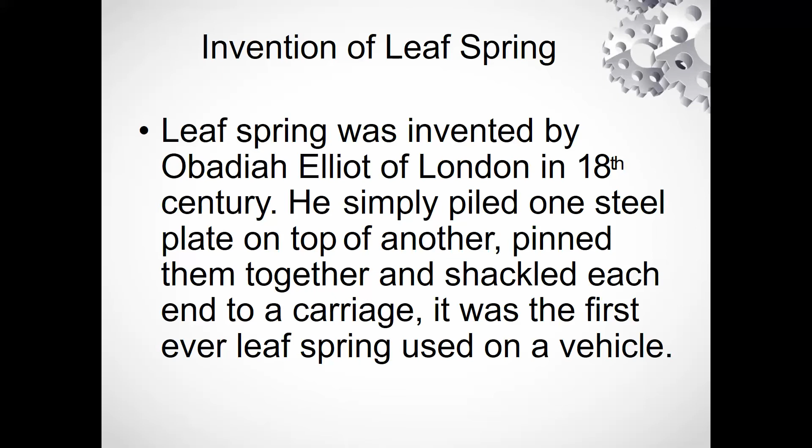Next, we will discuss the manufacturing, construction, and characteristics of leaf spring. Initially, we will start with: what is leaf spring? It is originally called a laminated or carriage spring, as we discussed in the introduction part, and sometimes referred to as a semi-elliptical cart spring.

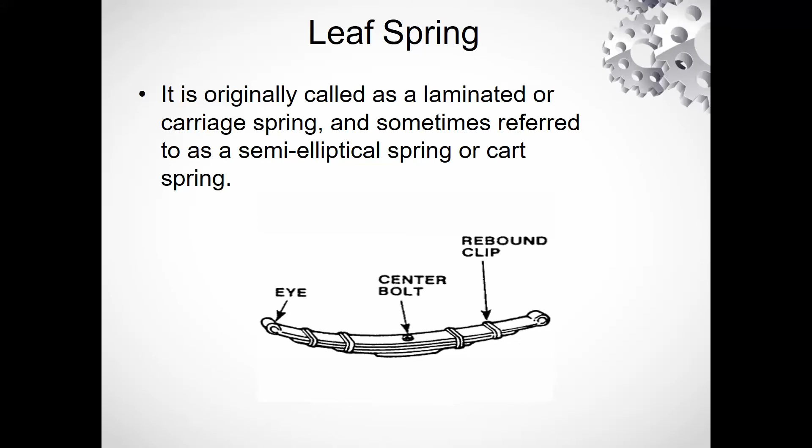The main components of the leaf spring are the eye, center bolt, and rebound clips. Rebound clips help to tie up the several size leaf springs, and the center bolt holds and ties them up to the middle one, and the eye helps us to lock it with the carriage.

Let's discuss the principle of leaf spring. The principle of leaf spring is that it is a simple type of suspension spring which is commonly used in heavy vehicles.

The overall purpose of a leaf spring is to provide support for a vehicle. It also provides a smoother ride, absorbing any humps and potholes in the road. Leaf springs are also used to locate the axle and control the height at which the vehicle rides, and help to keep the tire aligned on the road.

Because of these benefits, leaf springs are in high demand. Casual transportation is just one of the ways leaf springs have contributed to our transportation industries. These days, leaf springs are more popular with heavy commercial vehicles like trucks, SUVs, and vans.

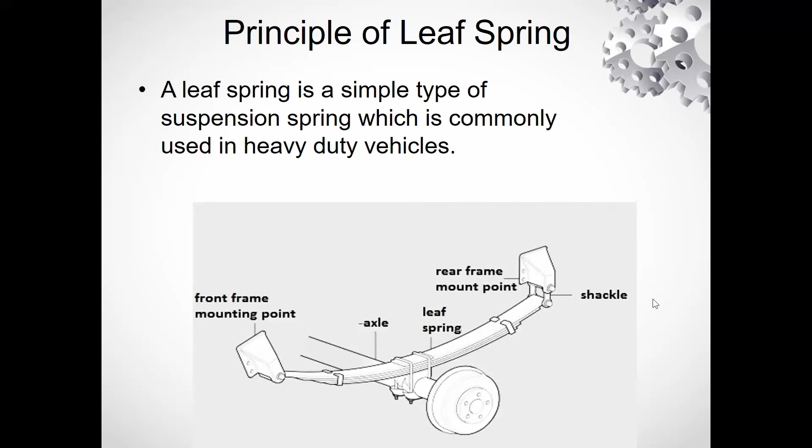Leaf springs have different roles in different sectors, as we will discuss, initially with farming. It is said that the idea of using leaf springs to support farm equipment inspired their invention. Leaf springs were used in medieval times, back when agriculture was a major industry leader. Improvements like the leaf spring made it easier and faster for farmers to haul and transport goods for trade.

Although the design of the leaf spring has improved over the years, the same concept is used in today's farms. In industrial equipment, leaf springs have also been used.

Without the use of leaf springs, construction vehicles would not be able to tow heavy loads. It is important for construction vehicles to be able to carry heavy items like bricks, stones, concrete, and massive materials. It really doesn't matter how large a vehicle is; if it is not designed to support overbearing loads, it will not carry out its duty, resulting in breakdown and unnecessary cost.

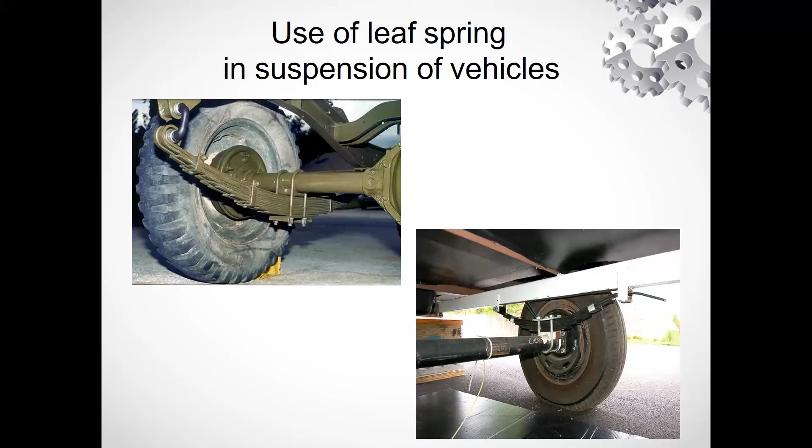In addition to transporting construction items, leaf springs are also beneficial to areas that tend to receive high amounts of snow. Plowing high volumes of snow can get heavy once it freezes. Having your truck equipped with heavy duty leaf springs will abolish unnecessary stress and help it last through the winters.

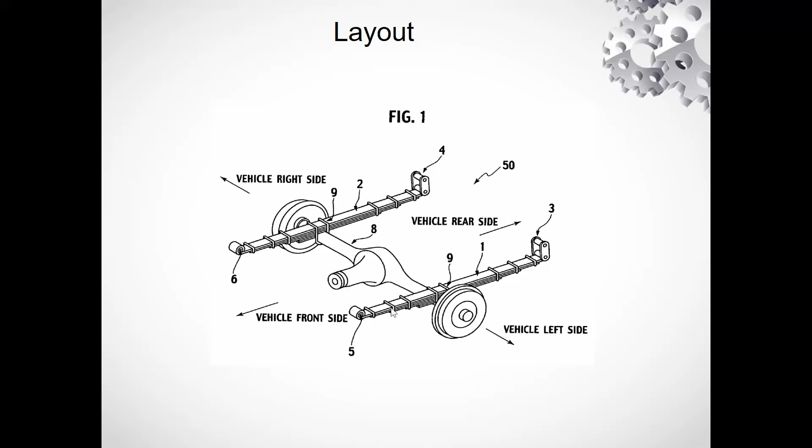Let's discuss the types of leaf springs. Initially we have elliptical or semi-elliptical leaf springs. Let's start with the elliptical leaf springs. Elliptical: two leaf springs can be combined facing away from each other to create an oval shape. This is known as elliptical. Then we have semi-elliptical. This is the normal shape of the multi-leaf springs, similar to the bow of a bow and arrow without the string.

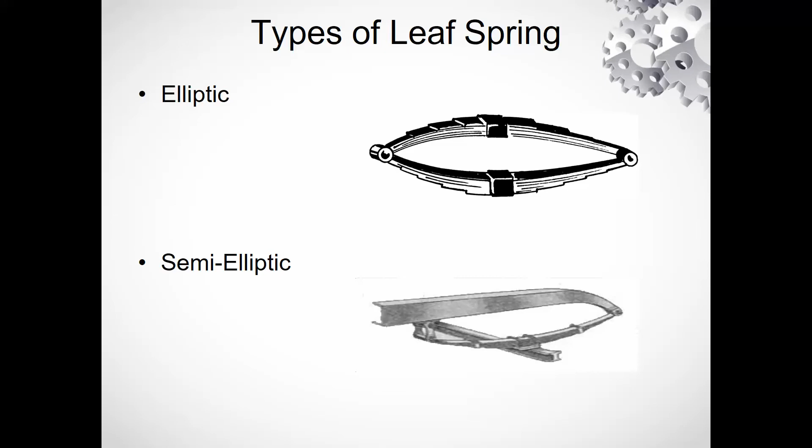Then we have 3/4 elliptic. In the 3/4 elliptic, some large vehicles can be seen sporting an extra half of a leaf spring to support the normal leaf spring positioned over the top of the axle. In quarter elliptic, this is an older type of leaf spring with a similar structure to that of a normal leaf spring. The only difference is that it is half.

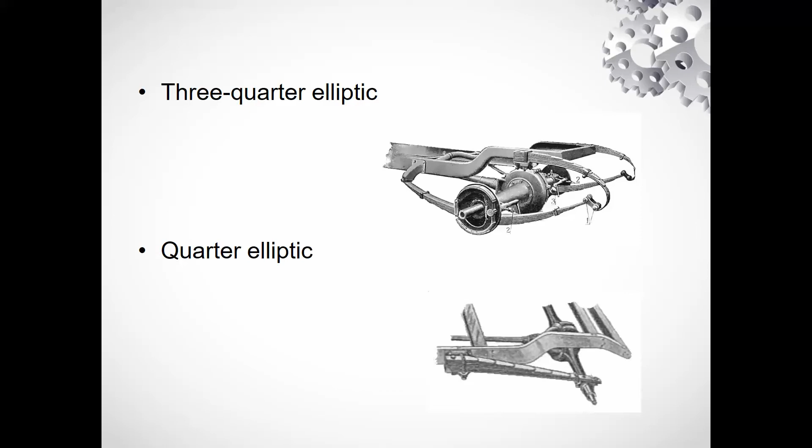Then, last, we have transverse. Transverse leaf springs were positioned across the car from wheel to wheel rather than over the wheel. Again, these are an older type of spring that isn't often used anymore.

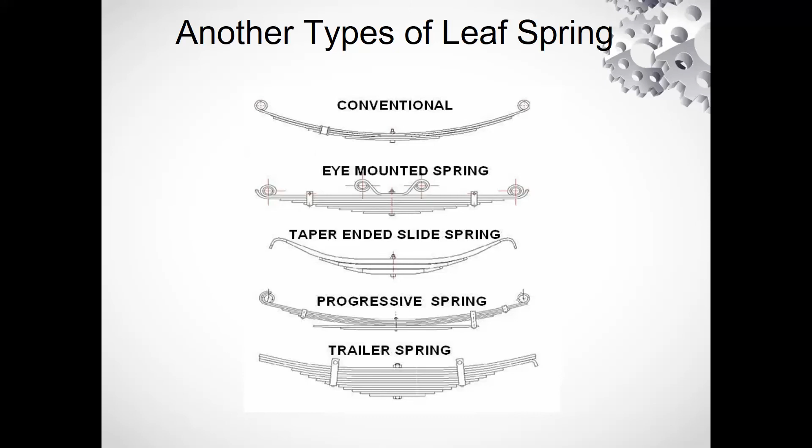Now we have some other types of leaf spring: conventional leaf springs, eye mounted leaf springs, taper ended slide springs, progressive springs, and trailer leaf springs. These are types of leaf springs which are used for special purposes, or they are designed only for some special vehicles.

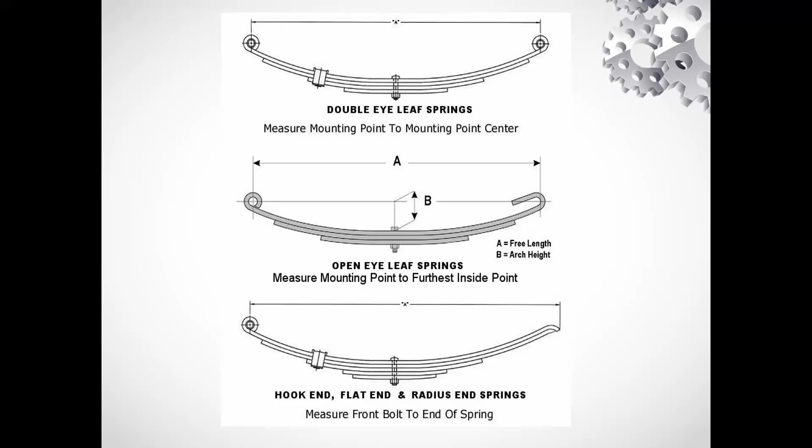Third type, we have hook end, flat end and radius end leaf springs, in which one side is eye-pieced, second we have radius end springs, and some leaf springs are flat end. These are combinations of different leaf springs arranged depending upon the use or specialized purpose. In the full tapered springs, you can see we have an eye at both ends.

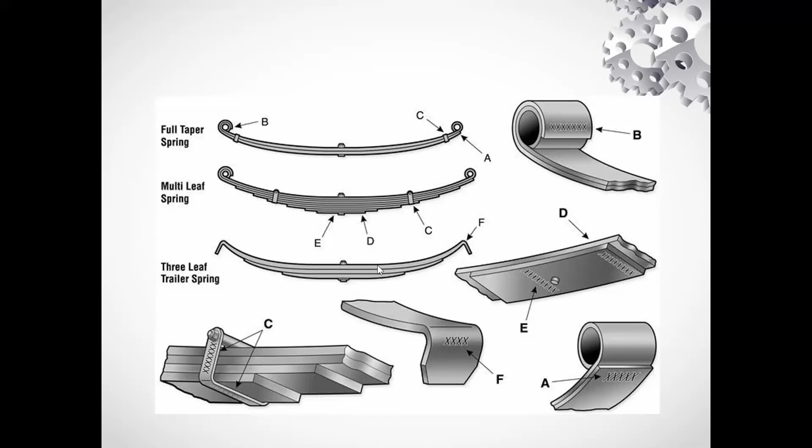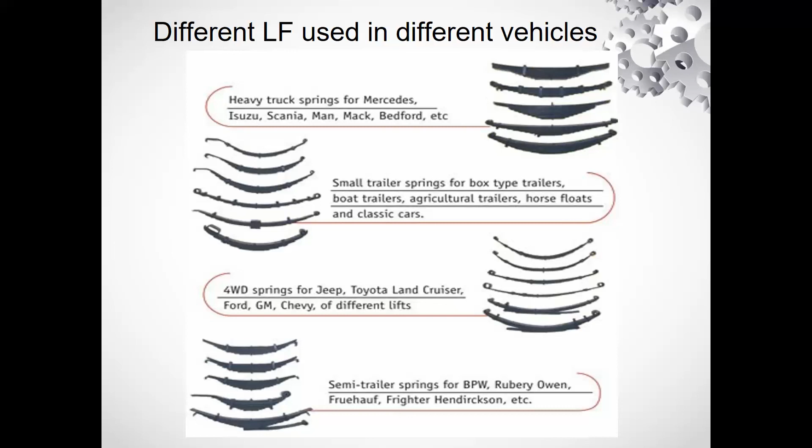Taking the next one, we have semi-trailer springs for BPW, Rubery Owen, Fruehauf, Frighter Hendrickson, etc.

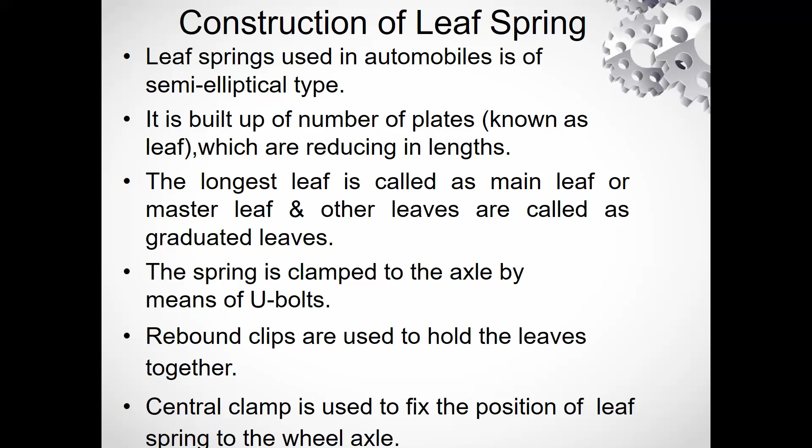This is the construction of a leaf spring, how the leaf spring will be formed, or how the combination of different leaf springs can be formed. Let's discuss the characteristics of leaf springs. The leaf spring acts as a linkage for holding the axle in position, and thus separate linkages are not necessary. We are eliminating the separate or additional linkage from the whole assembly. It makes the construction of the suspension simpler and stronger.

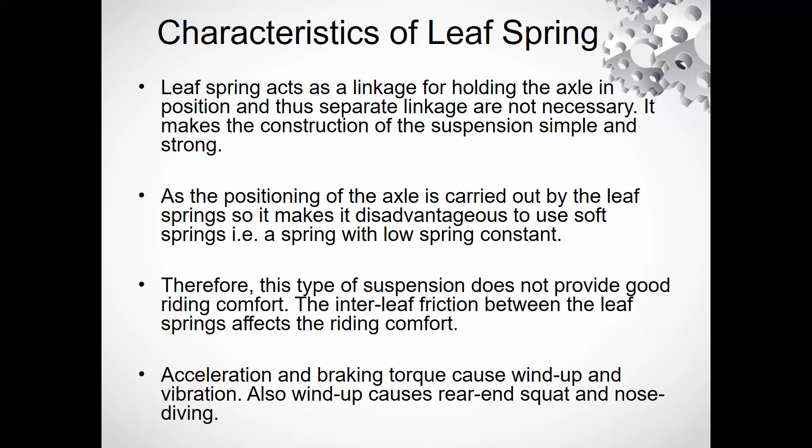The interleaf friction between the leaf springs affects the riding comfort. If we put some sleeves or friction reducing material between the leaves, it increases the riding comfort. Acceleration and braking torque cause wind up and vibration, and wind up causes rear end squat and nose diving.

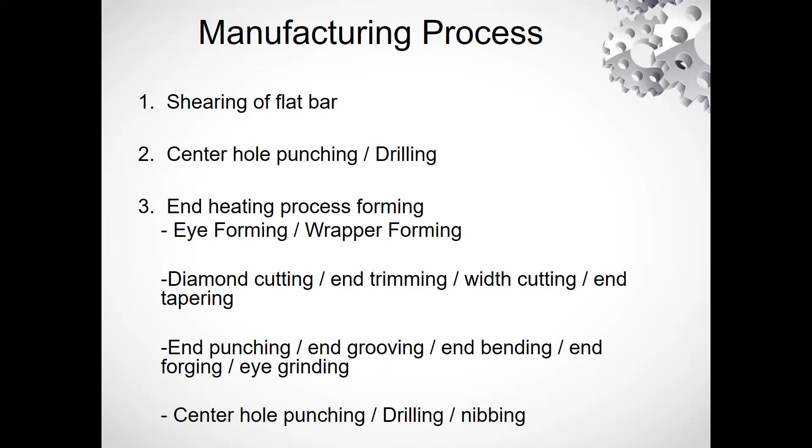We have to wrap one end of the leaf spring, which is known as the eye of the leaf spring. Diamond cutting and trimming, width cutting and tapering are the processes done on the master leaf spring. End punching, end grooving, end bending, forging and eye grinding. These are all the processes done on the end of the leaf springs. Then center hole punching, drilling and nibbing.

Next we have the heat treatment processes. For the heat treatment, initially we are heating all the leaves. Then we use camber forming, then the hardening process, then quenching, then tempering, by which we are able to harden the material as well as make it brittle. Third, we are tempering the leaf springs, by which we get a tempered, highly durable and efficient material.

Last, we use surface preparation. For this, shot peening or shot stress peening, and last is prime painting. Shot peening is the process by which we are able to reduce the internal stresses induced during cold working on leaf springs. In shot peening, we have 1 mm abrasive particles, kind of balls, which are shot on the leaf springs, which reduces the internal stress induced during cold working. Last, for better life cycle, we prime paint all the leaves.

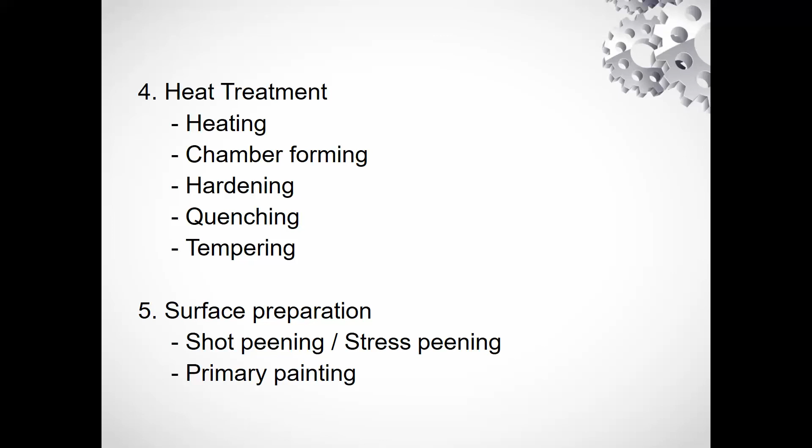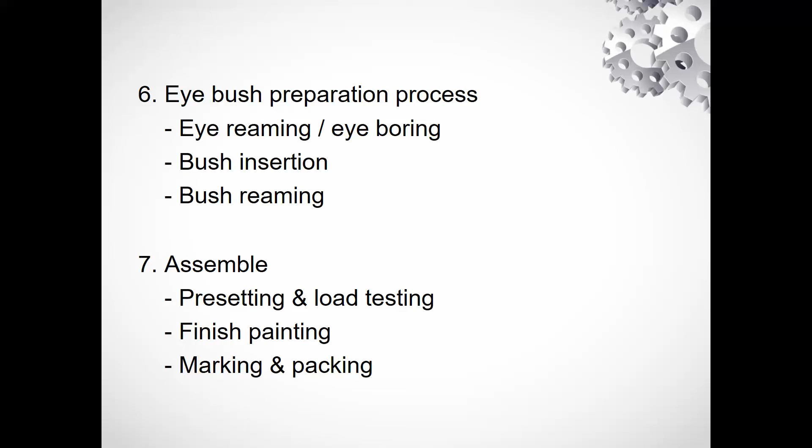Then assembly. In the assembly we have presetting and load testing. We preset, load is applied, and a fatigue test is taken for completion. Then finish painting, we paint the complete assembly. Then marking and packing occur for dispatch purposes.

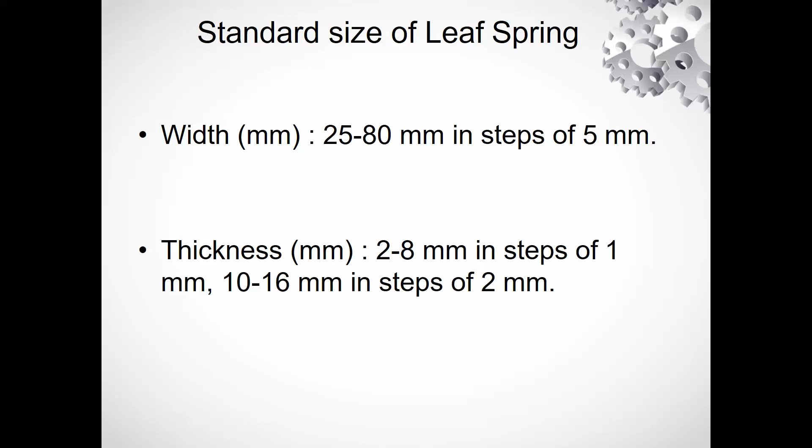The standard size of the leaf spring: these are some standard or basic dimensions for the leaf spring that could differ for different purposes. First, the width in mm could be 25 to 80 mm in steps of 5 mm, in gradual 5 mm increments. Next, the thickness would be 2 to 8 mm in steps of 1 mm, then 10 to 16 mm in steps of 2 mm.

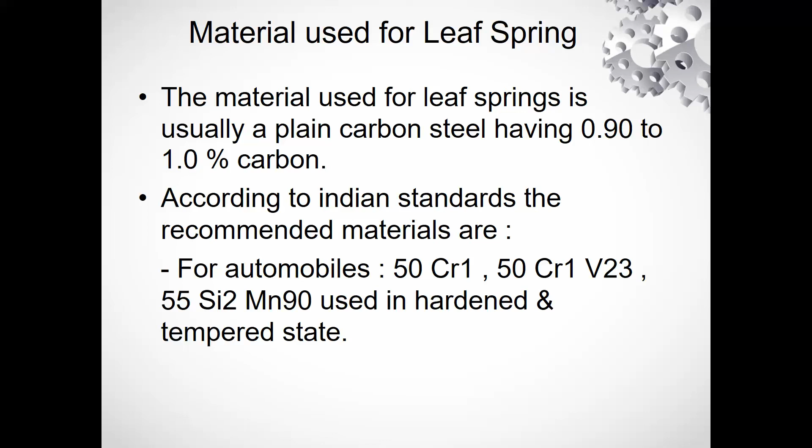Next, the material used for leaf springs is usually a plain carbon steel having 0.9% to 1% carbon in a ferrous material. According to Indian standards, the recommended materials for automobiles are 50 Cr1 and 50 Cr1 V23. Next we have 55 Si2 Mn90, used in the hardened and tempered state.

For railway springs, we use C55, water hardened, and C75, oil hardened. 40 Si2 Mn90, water hardened, and 55 Si2 Mn90, oil hardened material. These are all the materials used for leaf springs.